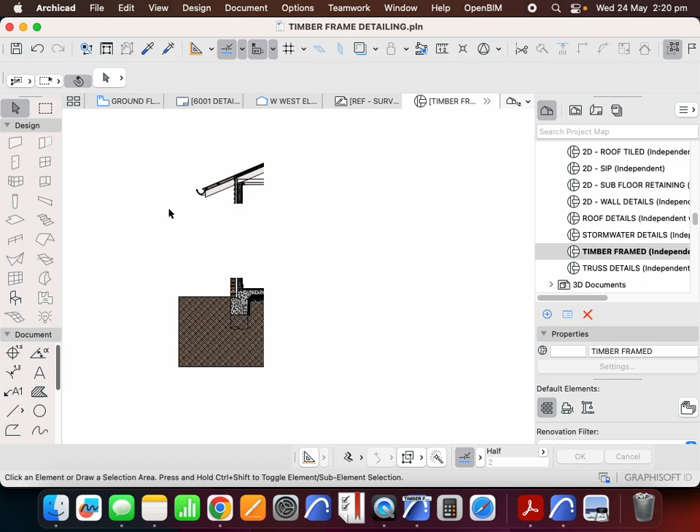Timber framing detail, where we're looking at 2D wall sectional detail, which includes the wall, its connection with the roof and ceiling, and the connection with the slab or framed floor. We've primarily just been focusing on a single story residence where we're not paying any attention to a first floor. That's what we're going to do now.

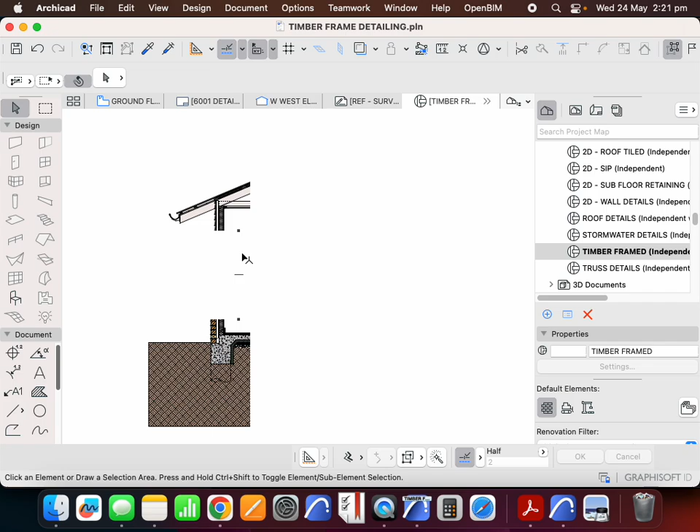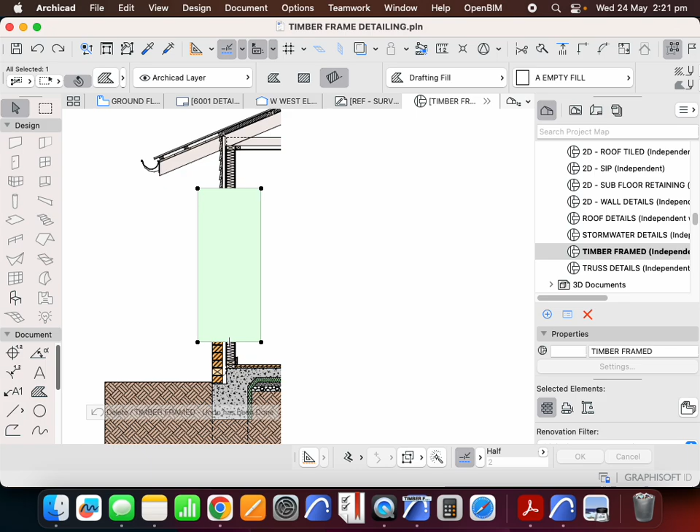So we're going to copy this detail. We'll move it across 10 meters like the other one was. And we're going to turn this into a 2-story detail. So in order to do that, we're in essence saying that that fill doesn't exist, and we're not really overly interested in what's happening from that connection, what's happening from this connection. We're going to add something in the middle.

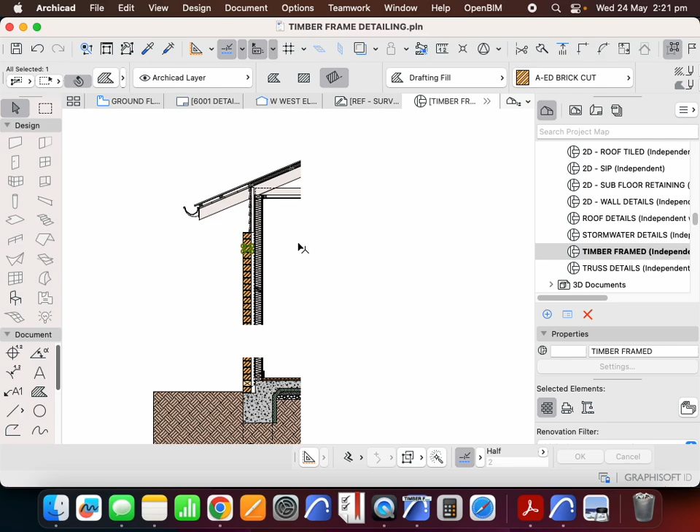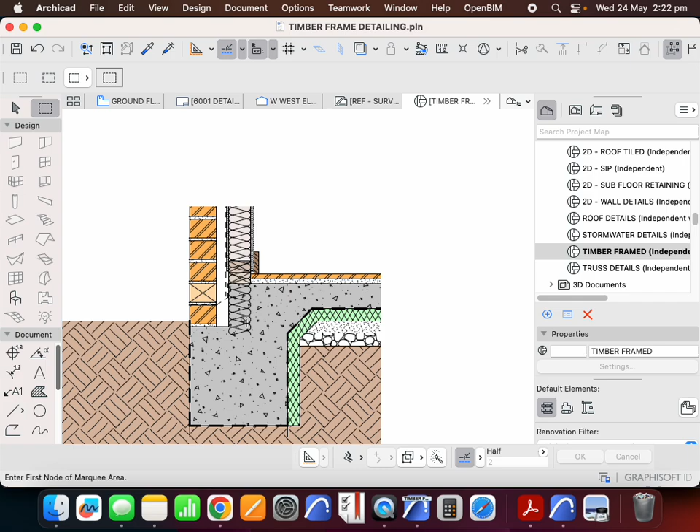Now we may actually do this slightly differently, or another way of saying that is we might add some more weatherboard for part of this, or we could have brick. It doesn't really matter. Now, what we're assuming here is that we're saying that there is a top plate of, let's move this down a touch. Edit, reshape, stretch. And we'll stretch this one down.

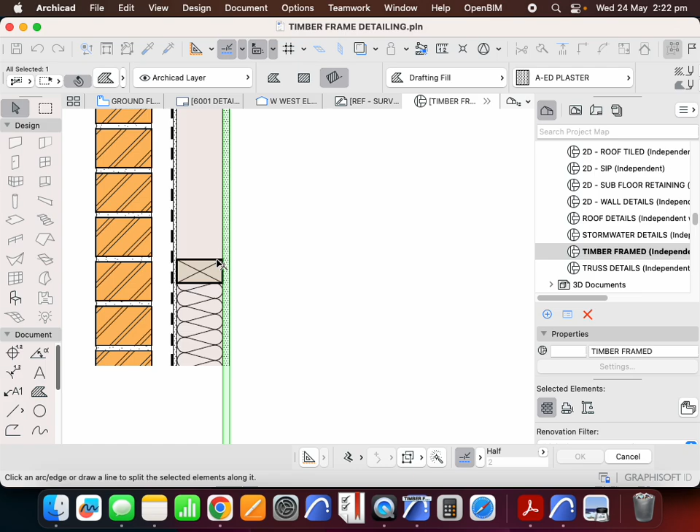So we have our insulation for our ground floor story. And then we need to have a break. What I tend to like doing is just breaking all of this here, and this makes life a lot easier rather than having to make it all stretch. So we'll just start by removing a section here, and then we can add it back later if necessary.

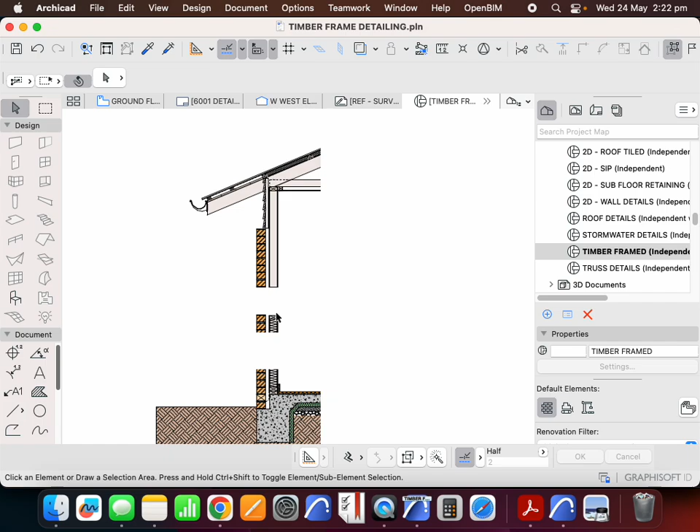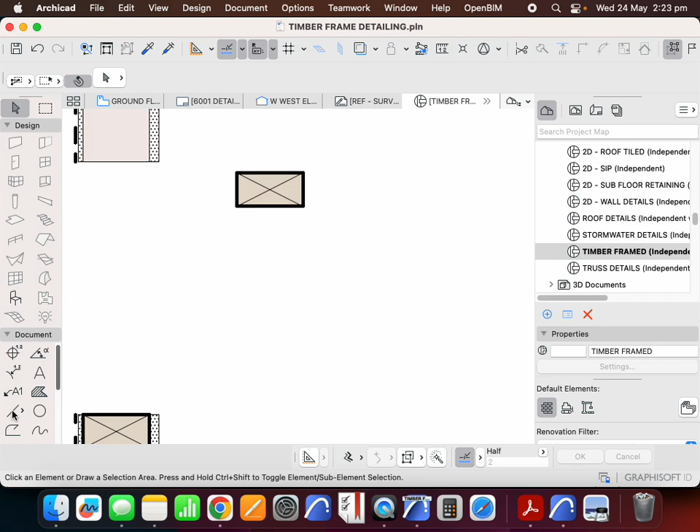Now, instead of having a framed floor out of pine, we're going to use an engineered timber. The engineered timber that we're going to use is called an I-joist, and sometimes it's got other names than that, but it's a block of timber. In this case, we're going to use one that's 90 by 45. And then there's another block of timber. And so these form the flanges. And then there is a piece of ply in the middle, which is what this was supposed to be.

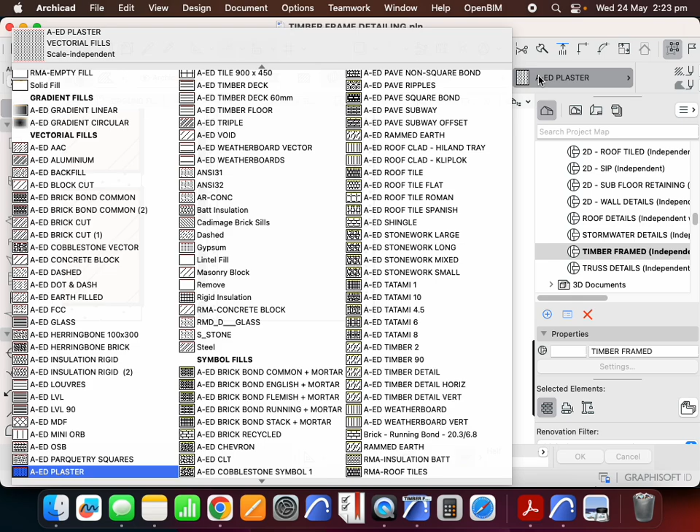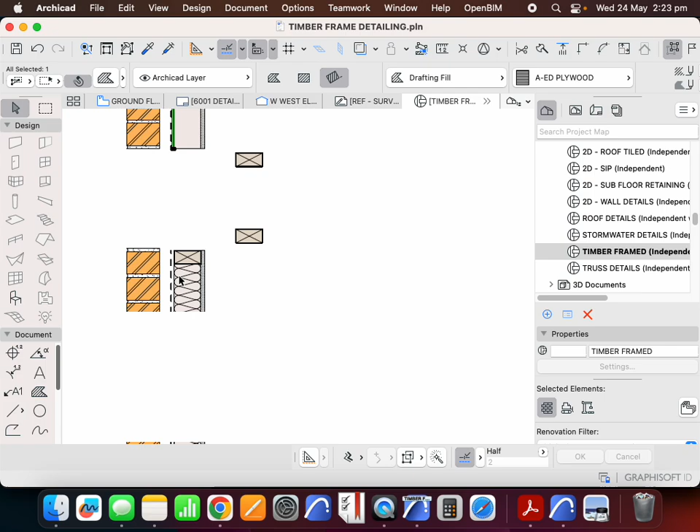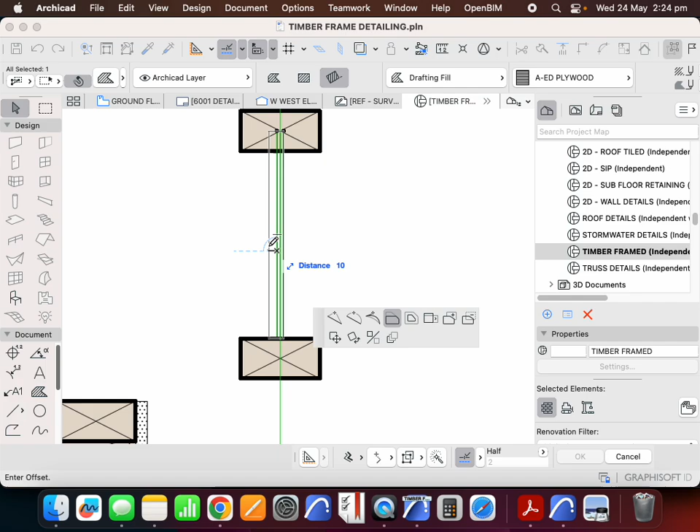I forgot to change it. So let's change this to plywood. And that's supposed to be rotated. So we'll copy this. And we'll make this a bit wider. So we'll make this 12 mil. So we'll go additional 3 that way, additional 2 that way.

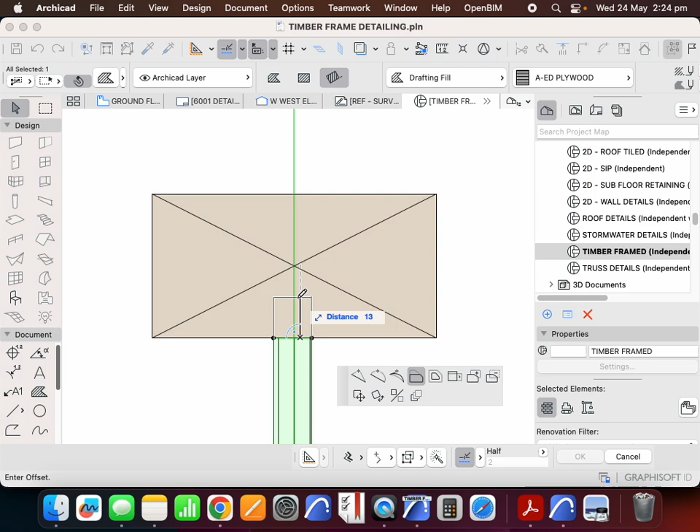And it's normally recessed not quite the half of the timber. I'm going to turn off true line weight for a second to make this easier to see. So we're going to recess this in 15 millimeters. And we'll recess this in 15 millimeters. And we'll just chop that out. And chop that one out.

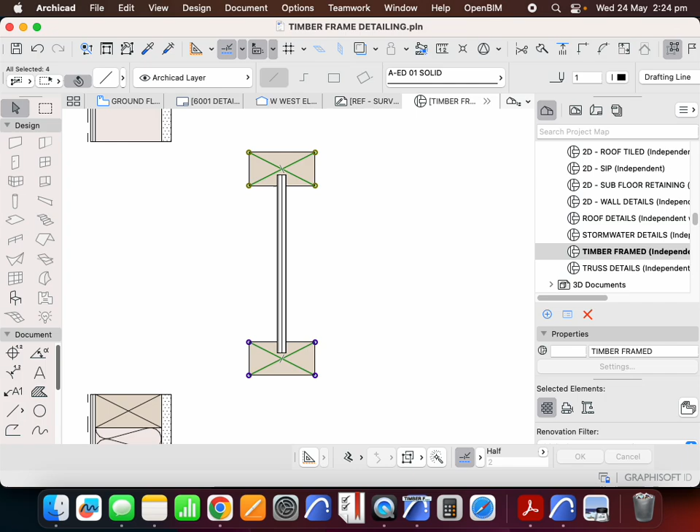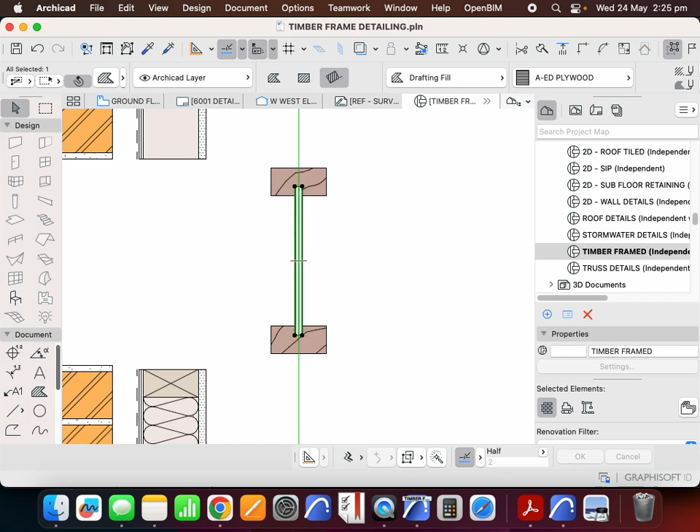Now I could get rid of these X's if that's not making a lot of sense. I could replace that with dressed timber, if that was a little bit easier to understand. The reality, it's not really dressed like that. It is still more just a structural element, but this might be slightly easier to comprehend. So this is what our I-joist looks like. Of course, we could add a color on the back of that as well.

Let's check that out. And this is in section, so we'll make the outline a little bit thicker as well. Great. So let's group that together. That's our I-joist. Now the idea is that this is our main structural element for the first frame floor. Now you might say this isn't really strong, and yeah, that's true. It's not really strong. The point is that it doesn't need to be as strong as it is tall.

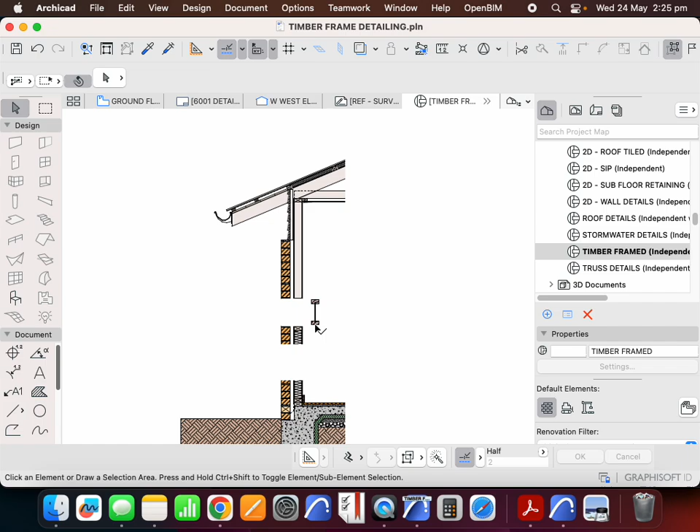In this case, it needs to be tall so that it can allow for things like plumbing traps and air conditioning ducts. We could get away with spanning most first framed floors with maybe a 200mm beam. But in this case, we're going to use a 300mm beam so that it has the ability to not just span a long way, but also to be able to take those other services.

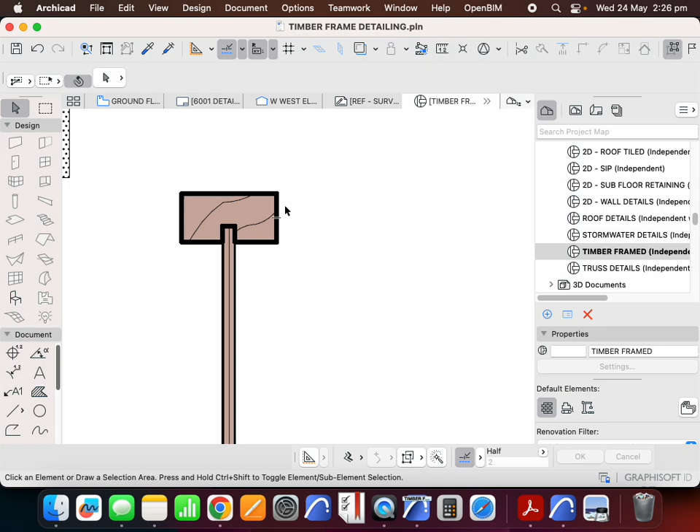I like using this larger flanged section, the one with a 90mm flange. It just makes construction easier. It's not considerably more expensive, and of course it's a little bit stronger than the 45 or 63mm flanged version.

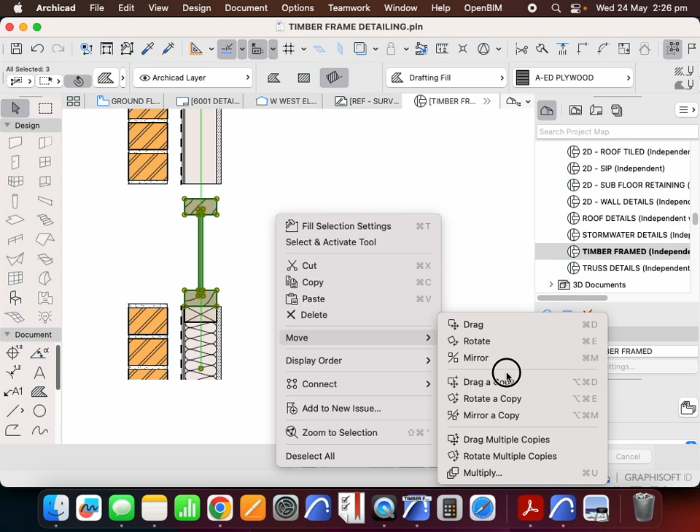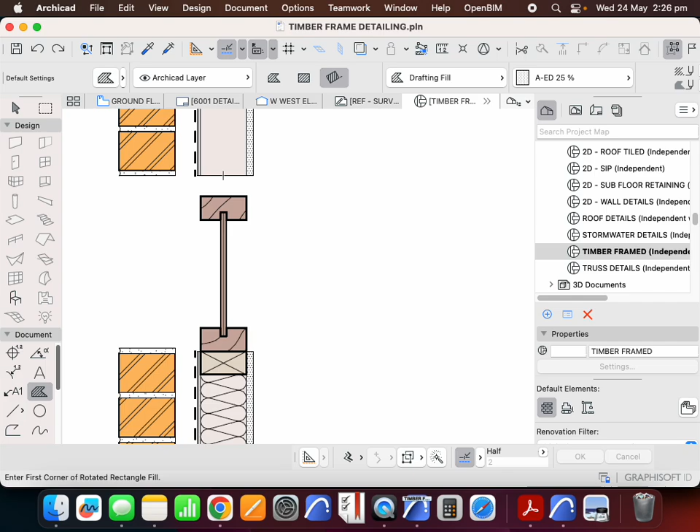Now, depending on which way we're looking at this detail, or depending on which way the floor is being cut, our joist is going to sit here, and then it's going to be multiplied at something. So at 600 centers, 450 centers. And so we may be seeing it in this direction. In this case, I won't make it viewed in this direction because that's hard to tell, hard to understand. So instead we'll see it in the other direction. So it's going to be spanning this way.

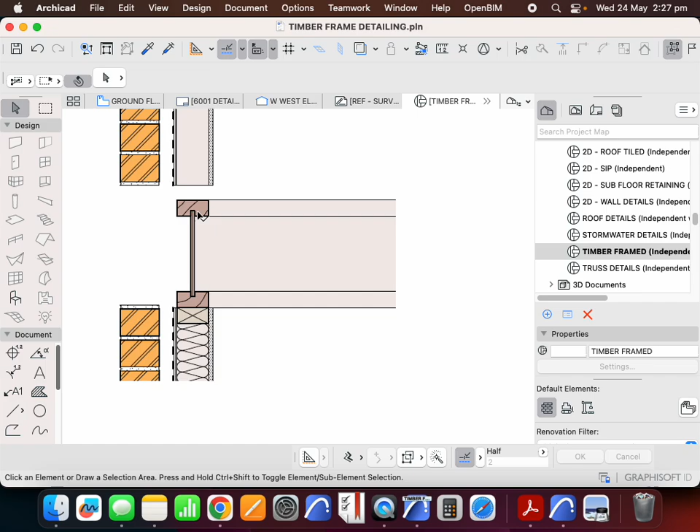So in order to represent this, I'm going to draw this same I-joist, but I'm going to draw it in elevation. So of course it looks like that, and basically like that. So this is our I-joist in elevation, and therefore what this is doing is creating blocking. So what we're seeing is the blocking between. Now in order for that to be blocking between, we should also see another bit there. Now we're missing the bottom plate of the next, so let's copy this one.

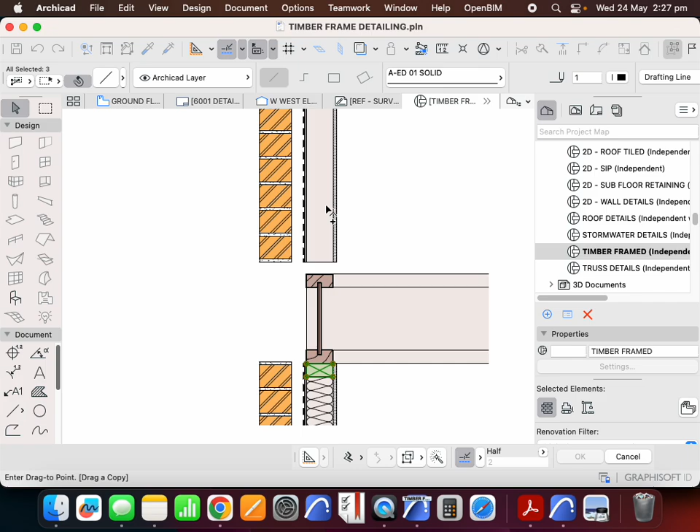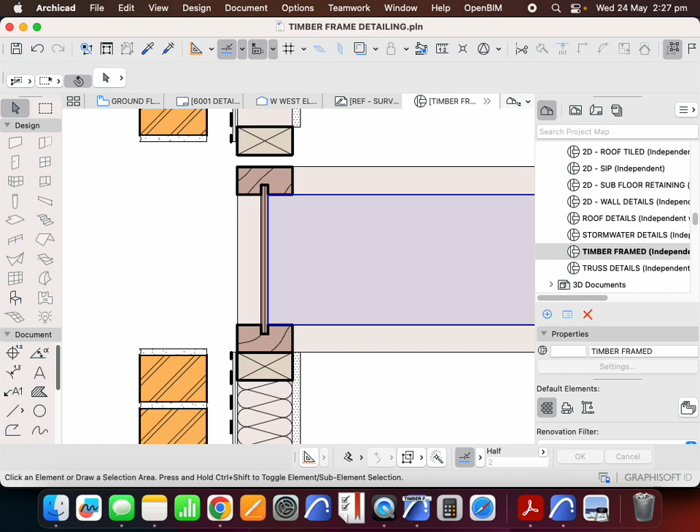Now we don't want the bottom plate to sit directly on the floor joist. Before we have the floor joist, we're going to have our structural flooring. So I'm going to go up 19mm, and that's going to allow for 19mm of plywood. So just like we had plywood here, we're going to copy this ply. Let's just do that before we start, just so that's easy to understand. I'll copy this plywood, move, drag a copy, rotate,

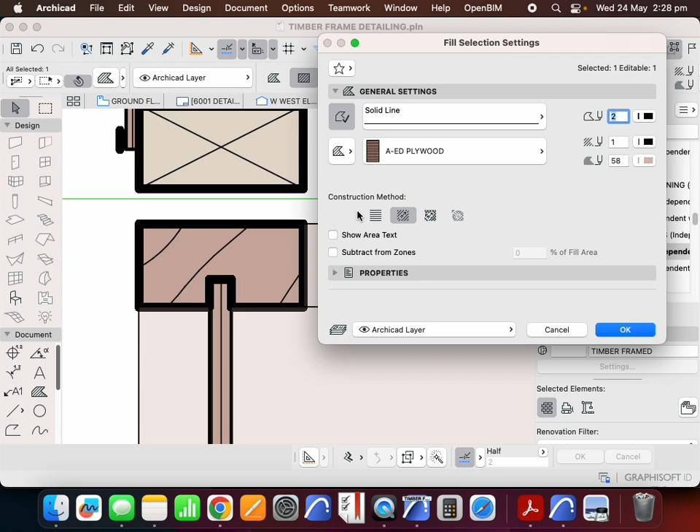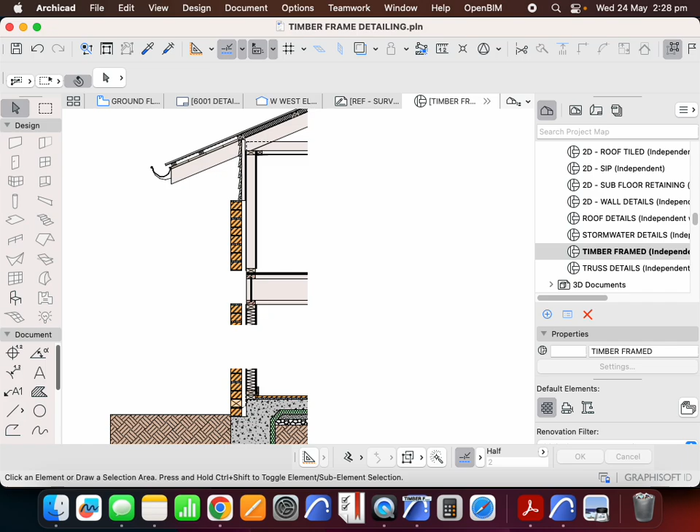and I don't need to have the fill in the same way, so I could turn fill back to normal. So it's going to sit here, and I want this plywood to be 19mm thick. We'll extend this one all the way through, and that's our structural flooring. Now on top of our structural flooring, we'll also have something else. And so that could be carpet, or it could be tile, like I had down here.

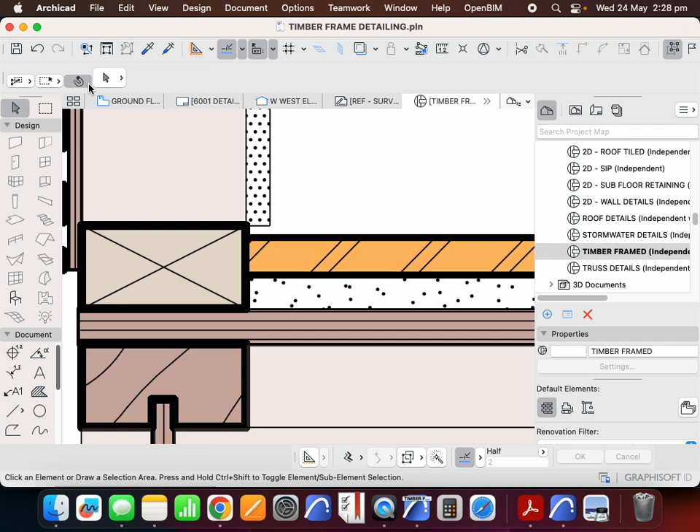Now I wouldn't be using plywood if it was a bathroom, but if it was a living space or a bedroom, let's say I wanted it to be tiled, I could do something like that. Similarly as before, in order to make this work, once we have a thicker flooring, so let's leave that as it is at the moment. So I could double up this bottom plate and leave a bit of a gap with my plasterboard, and then I could add a skirting board down here.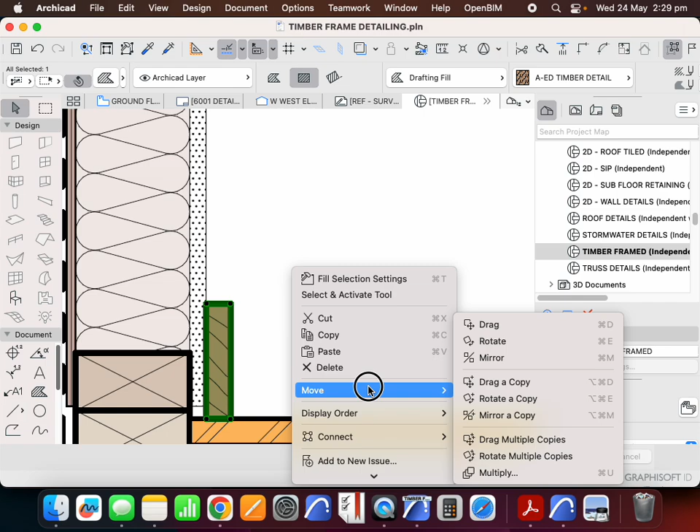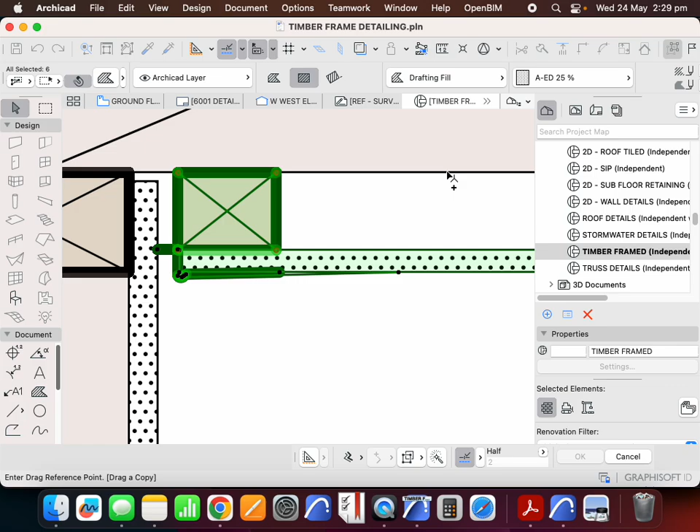How do we do the ceiling? Now the ceiling could be plasterboard direct stick to the underside of this, or we can do the same detail as over here. So that's what I'll do in this case. Copy this down. My intention, of course, is just to make this easy for myself and make it fast for you to be able to recreate as well. So just look back at another video to see how and why we did this.

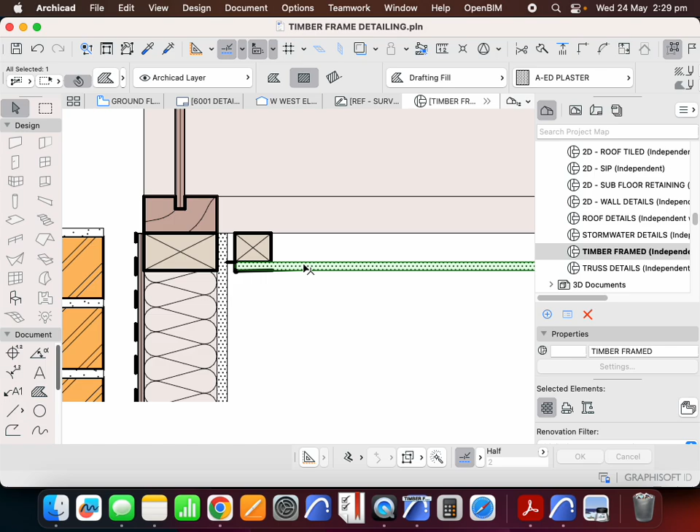So this allows the plasterboard to run up past. The batten also means that if there's any inconsistencies with the set out of these high joists, the batten will reduce any inconsistency so the plasterboard can be flatter and will reduce the likelihood of cracking.

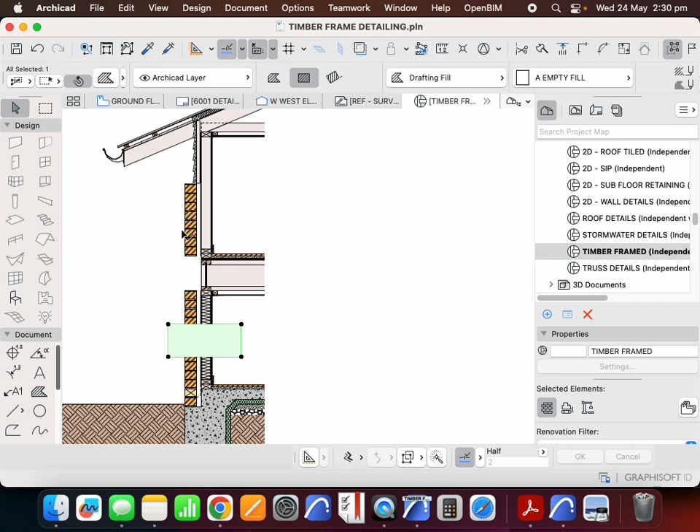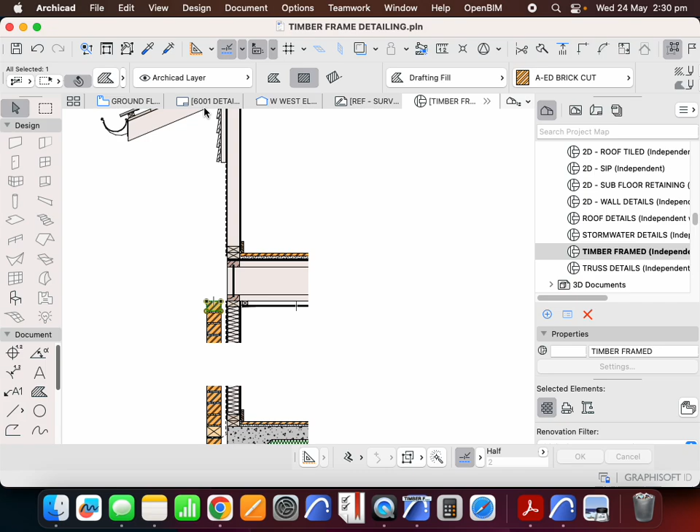Just like I've got this fill here, which is breaking the wall, I'll then need to do the same thing here. Now this is not representing really well at the moment, is it? Generally speaking, I will want the brick to stop somewhere. That might be the top of the floor, or it might be the bottom of the floor down here, and then I'll have my weatherboard extending down. Now, typically I'm probably going to try to relate that to a datum, something that makes sense on the outside of the building. I could have this brick running the whole way up, or I could have this brick stopping. So it doesn't really matter is the point, and we can do it in a few different ways.

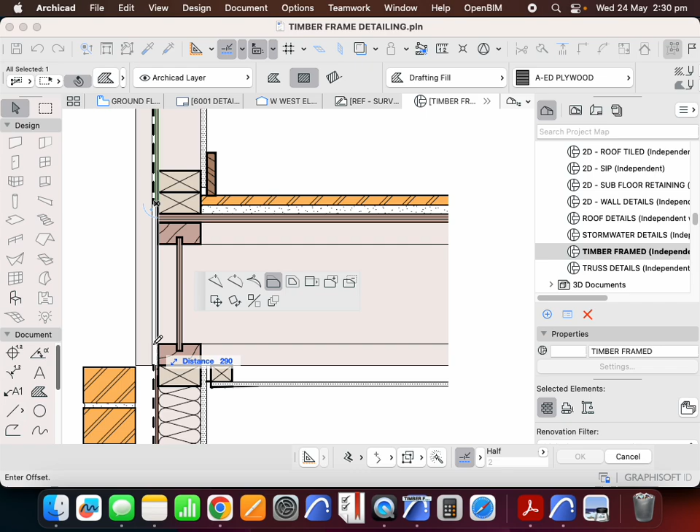So just to make this simple at the moment, run this down, and we're going to use the bottom of our floor to define the edge of this. And we're going to run this all the way down just so it's consistent, and we'll be running the sarking or the membrane all the way down. Now I get to show you how we finish these at the bottom. So let's copy all these, and we'll go move, drag multiple copies using that as the reference point.

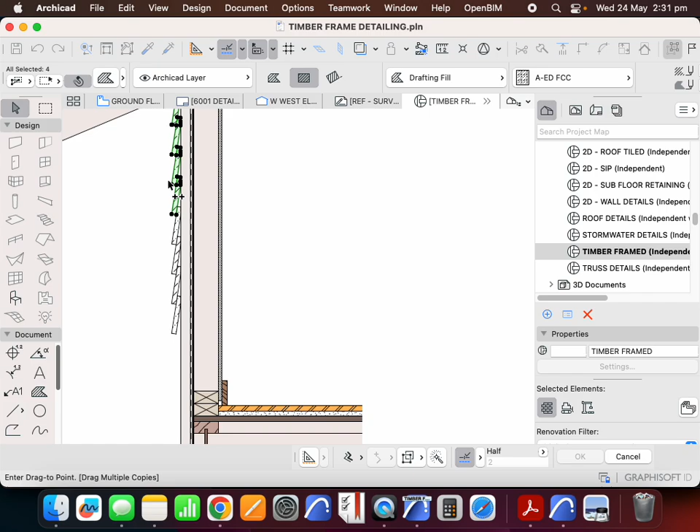And I always just do more than I need, and then I can quickly delete any leftovers. So I don't need this one, don't need this one, and obviously this one is only half. So we'll chop that off. And I also want to leave a little bit of a gap. I don't want to have weatherboard touching the brick, so let's leave a 10 mil gap there.

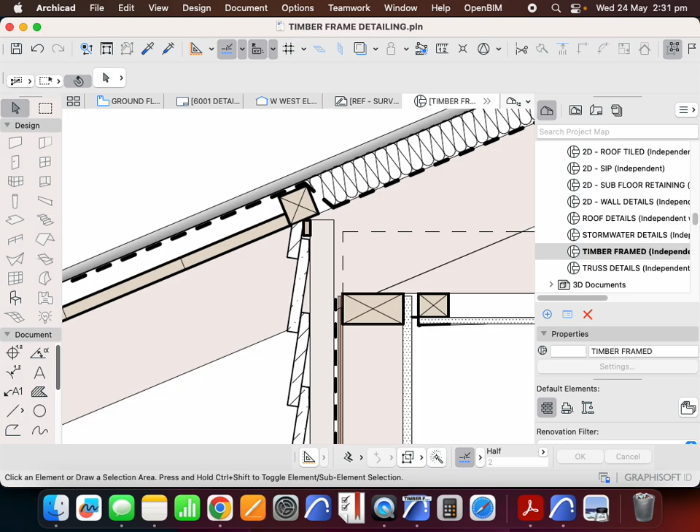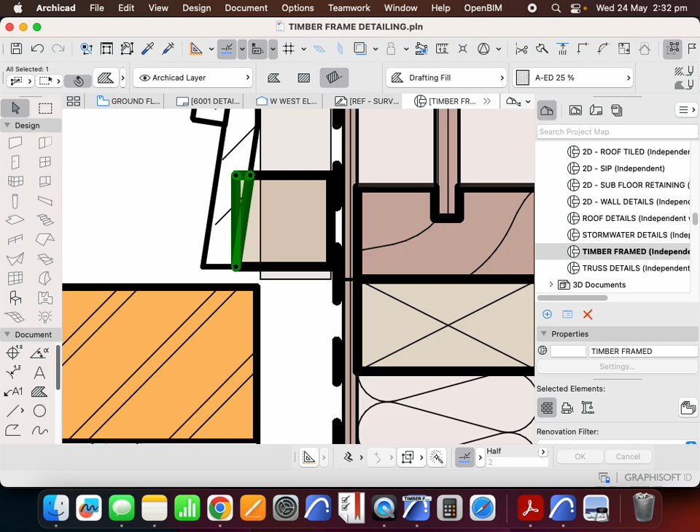And then it's a question of how this is finished, because of course this isn't going to work, is it? So we need some type of, again, blocking like we had up here, packing. Now typically we could use a proper packer. In this case, what I'll do is use a larger block of timber, and this would be cut to fit perfectly to size. So we'll stop the vertical batten, that'll turn into horizontal batten, and that'll be cut to size in order to be able to put this in the right position so the angle is consistent.

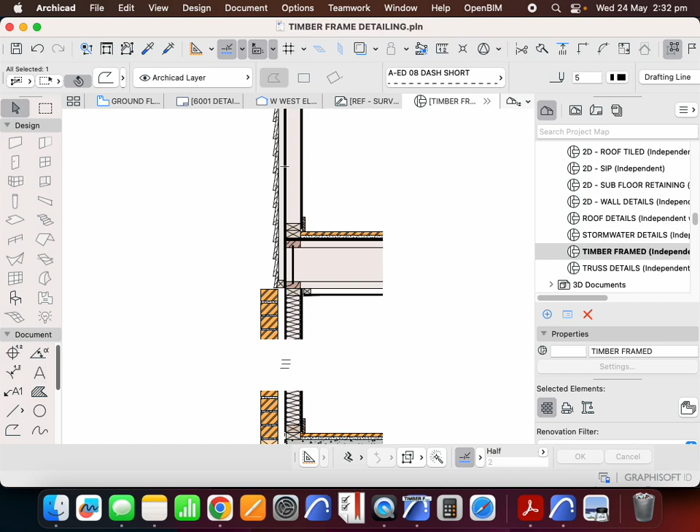Now I need to get a little bit more detailed here. So I've got my sarking. I don't want this sarking just to run the whole way down. I want to have some type of flashing. So I could have a hard flashing, so a folded Colorbond flashing, going from the outside of the brick, so over the edge of the brick. That will then sit behind the sarking. Let's make that 4.

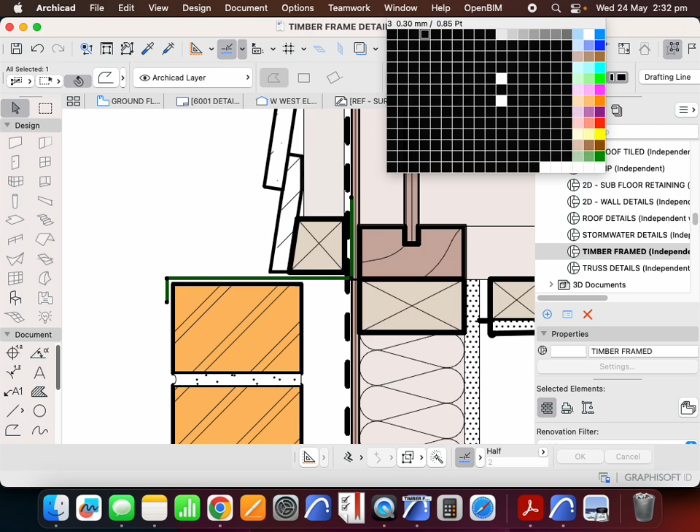And then of course the sarking would start again here. So this is acting like the weep hole, like we have in the bottom of the brick. In this case, the folded capping is also creating this overlap between the brick and the cladding.

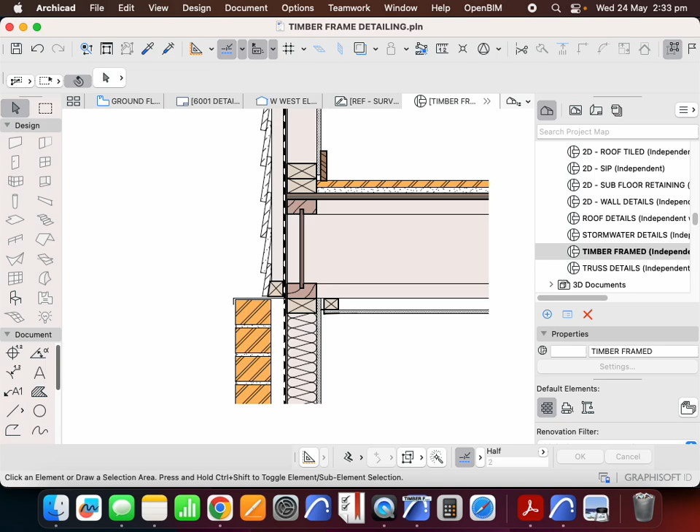Now we could say, I don't like the look of that detail. I don't like the fact that this brick is sticking out a long way and the weatherboard is set all the way back. Now this is common, but if we wanted, we could of course pack all of this weatherboard out so it was flush with the outside of the brick. But in order to do that, we'd need a much larger batten. In this case, I really don't care. I'm happy to have this spaced.

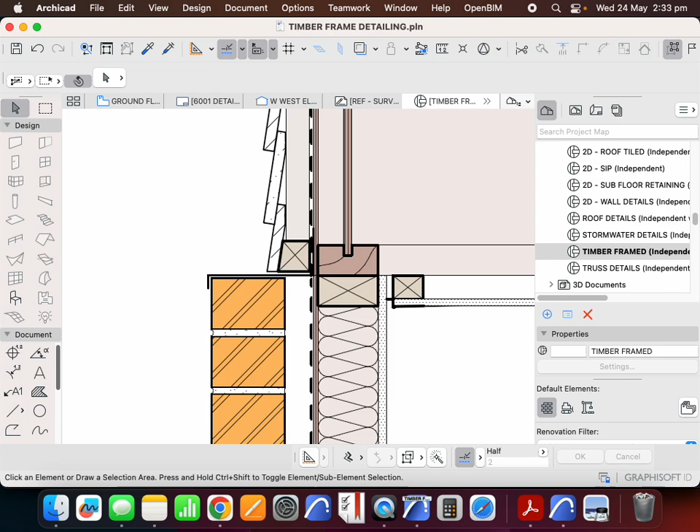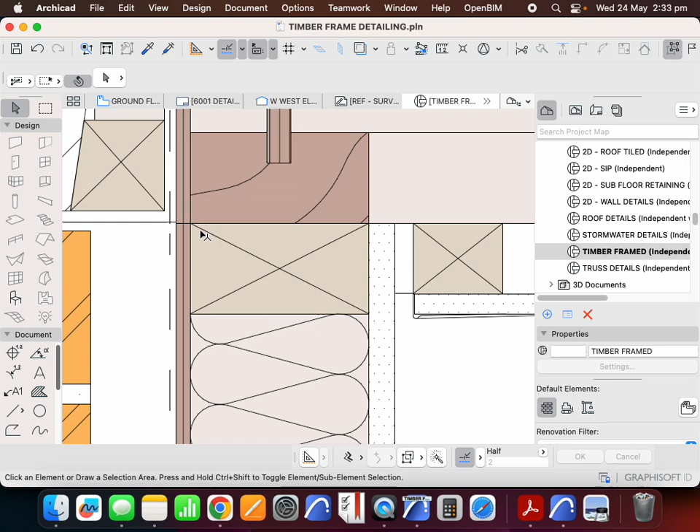There's one more detail that I need to explain in terms of this capping, and that is, in order to make this capping look nice, I don't just want to finish like this either. I actually want to double this back, or fold this back, and that'll make this capping significantly stiffer by having a crunch fold on the back. Now this capping needs to go up higher. It needs to be about 150 mil at least, and I'll stop this short just to explain what's happening there a little bit more clearly.

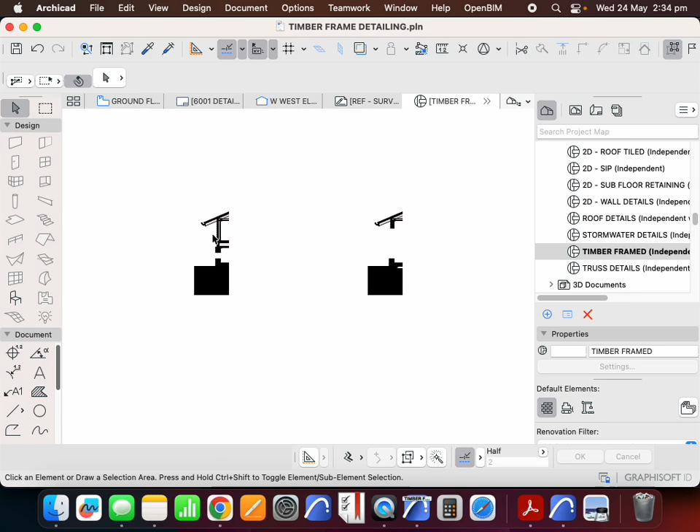And so now I'm transitioning from brick veneer to timber frame and clad. In this case it's a horizontal weatherboard, and that weatherboard is made out of fiber cement. So of course we could substitute any of these other finishes that we've been talking about. So it could be a quad gutter, it could be a flat soffit, it could be Hebel cladding. It really doesn't matter. These are all now external systems which can then just get plugged into our timber frame structure.

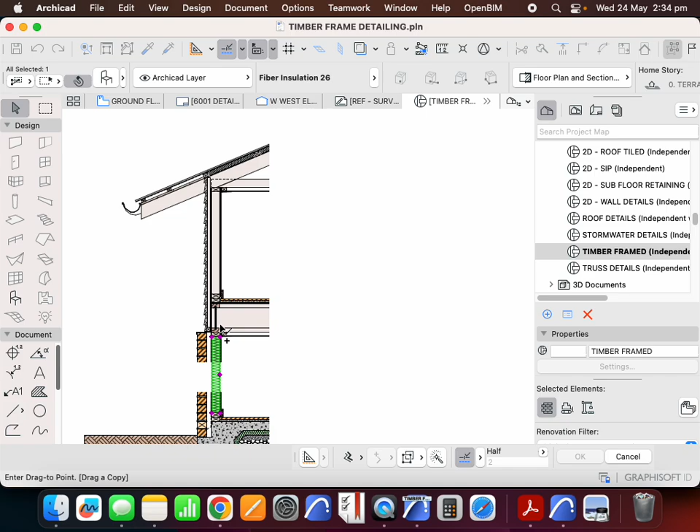To finish this off, let's extend this insulation. We also need our ceiling insulation, so I'll copy this across.

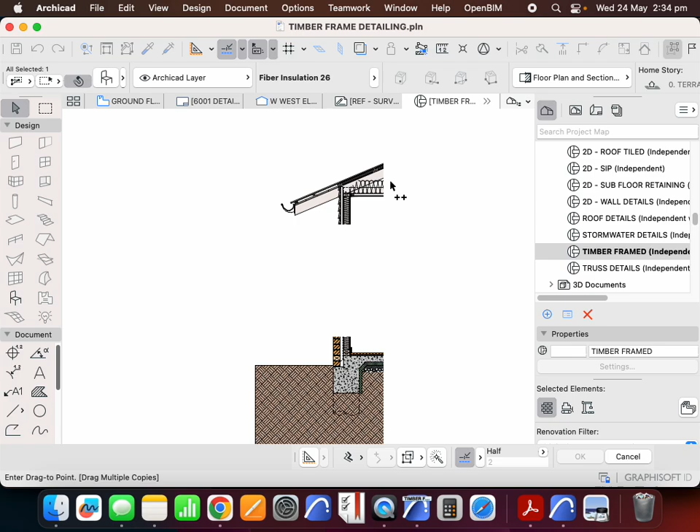There's a few little things that I had missed before or hadn't explained very well. One of those is brick ties. So when we have a timber frame wall, we also need to connect the brick into the timber frame. The brick on its own could be structural, but because it's a single skin brick, it's not very good at being structural.

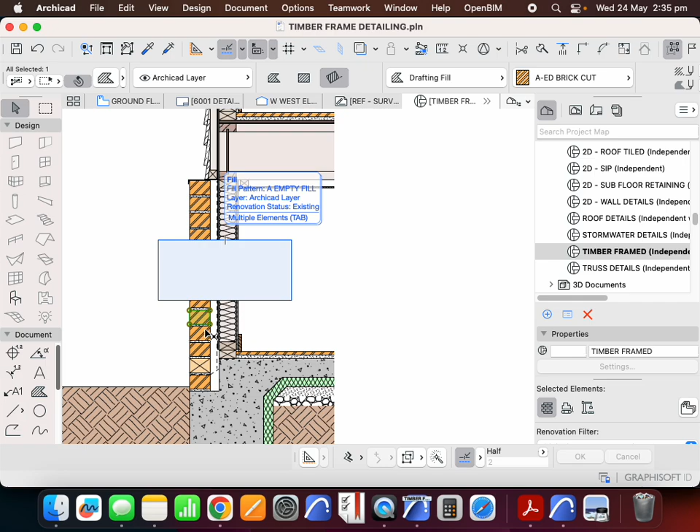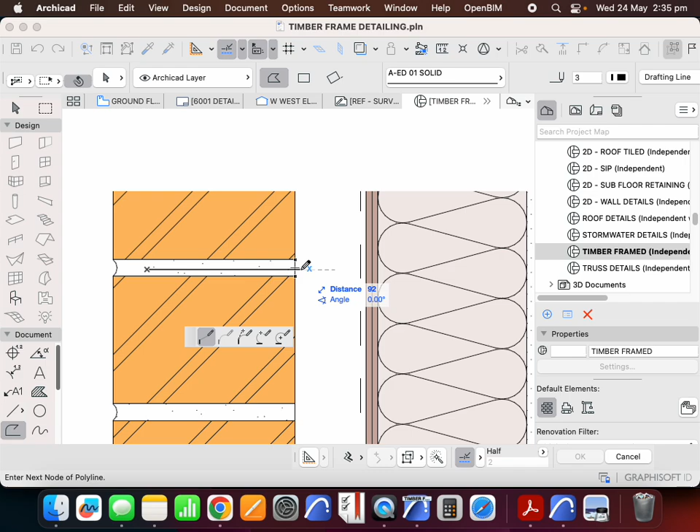So in order to be able to make it strong or not fall over, we're going to tie it into our timber frame, which in this case is the structure. Generally, we need brick ties every 6 courses. Because I can't see that, I'm just going to add one here. And what that brick tie will look like in this particular instance is it will be bedded into the mortar bed. And then I want it to have a bit of a kink.

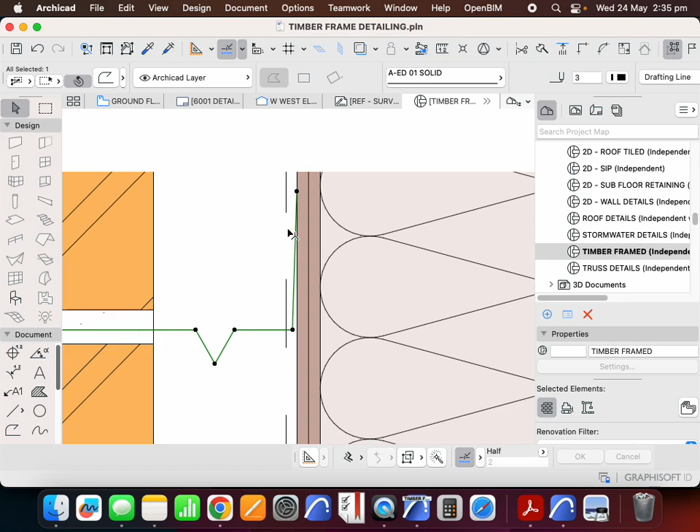That's going to allow water to drain if it's running along. Sorry, let me finish this to make a bit more sense. Any water that's running through the brick is then going to drip down the cavity rather than running all the way to the wall. And then I'm going to have the tie, which then gets screw or nail fixed into a stud.

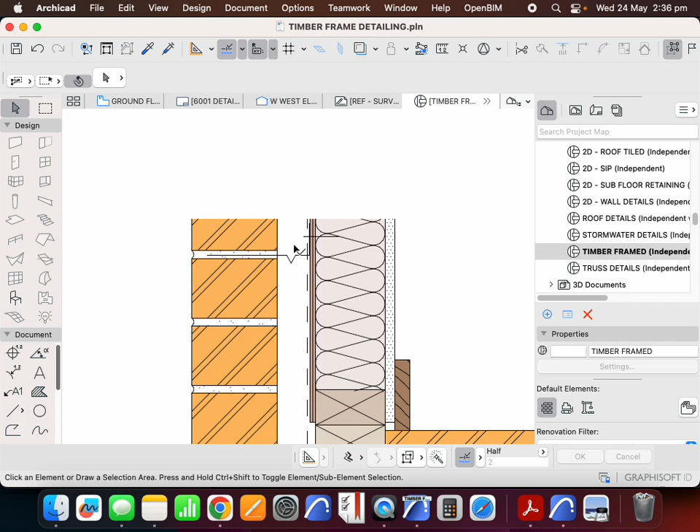So I could just change that to be a center line or a dash line. And that's our brick tie. And of course, we'll have another one further up. So we can repeat this. So let's just put one here just for the sake of representation. Now I'm still missing some information. So how am I providing termite protection?

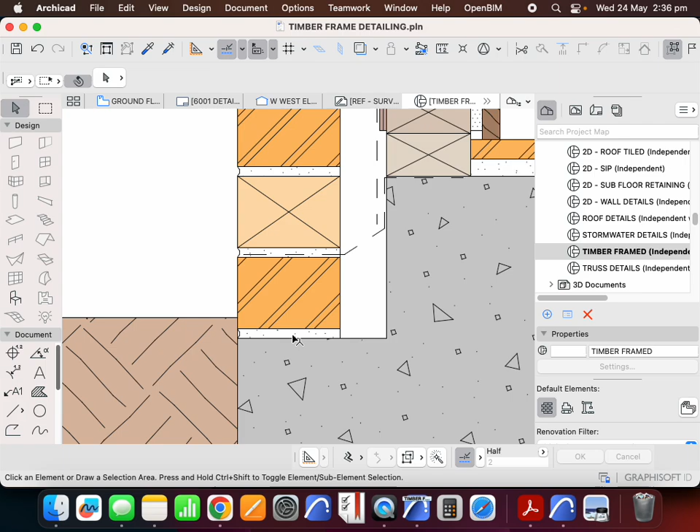In this case, it's very possible that we could have termites coming from the ground, going through this mortar joint, going up here and into the building. So I'll typically require one of a few different solutions. So I'll need some type of membrane, which is going to make them not want to climb up here. That might be Kordon, so a plastic with chemical impregnated in it, which is not really nice for termites.

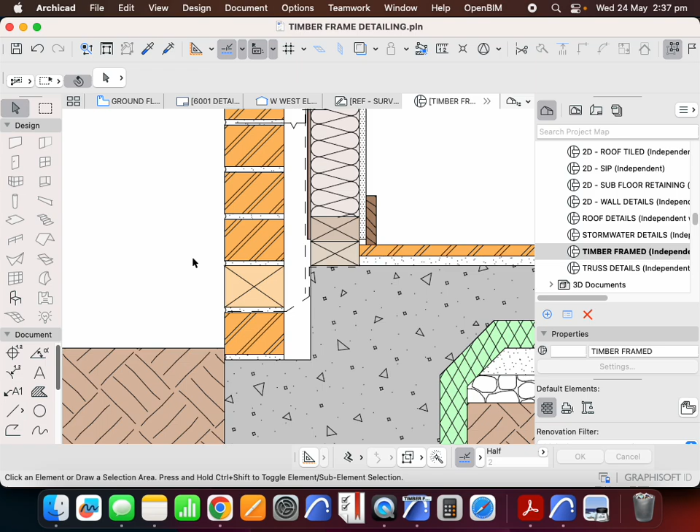Or we might have Granitgard, meaning that it's a physical barrier. They can't climb through the granite is the idea, the little bits of granite. Or we might have a termi-mesh. And the idea of a termi-mesh is that it's similar to the granite guard. In this case, it's woven stainless steel with a really tiny aperture, and it stops the termites from climbing through that as well. So that's the 3 most common methods of how we would do this approach.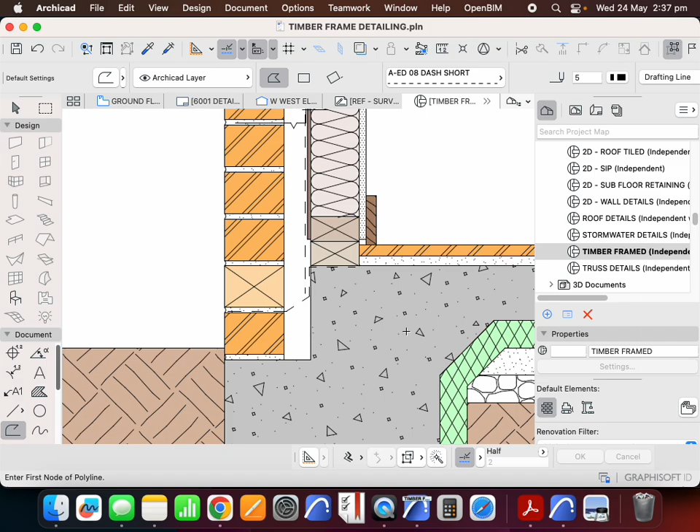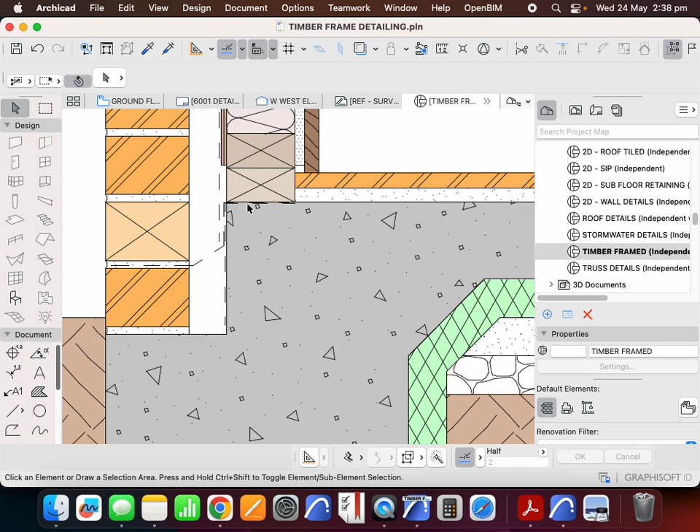Now, if I was doing Kordon, I'd probably just use a thick line, a really thick line. I'd probably make it dashed. And I would be showing that that is fixed to the downturn here. It'll be sitting underneath my flashing. And so it'll be a second layer, basically, something like that. And that Kordon will extend through here a little bit. So we could have a Kordon finish.

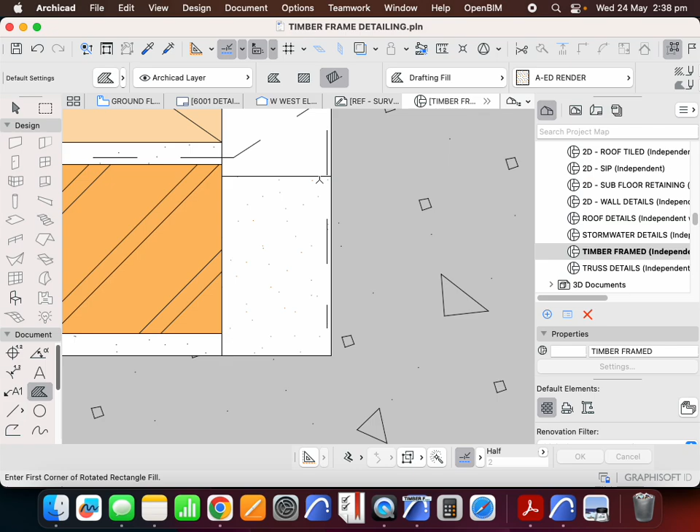We could have a Granitgard. The Granitgard will basically be a little tiny gravel. It's going to be hard for me to represent that, so I'll just represent that as render at the moment, and that will fill up the bottom of this space. And I might just change the colors of that. Let's make it real dark. So that could be my Granitgard.

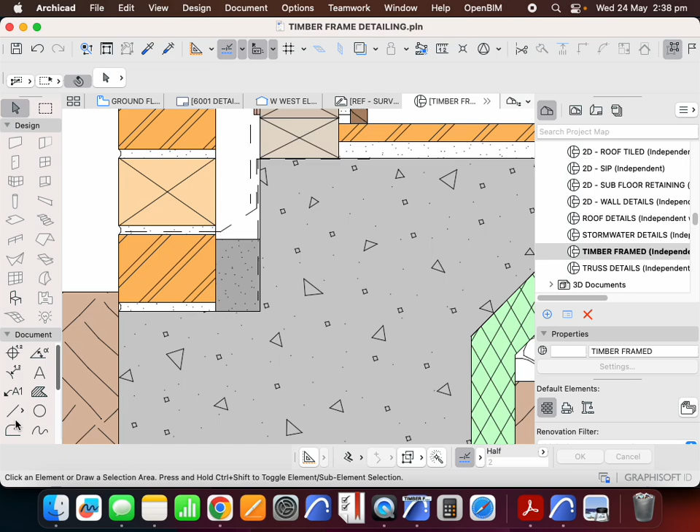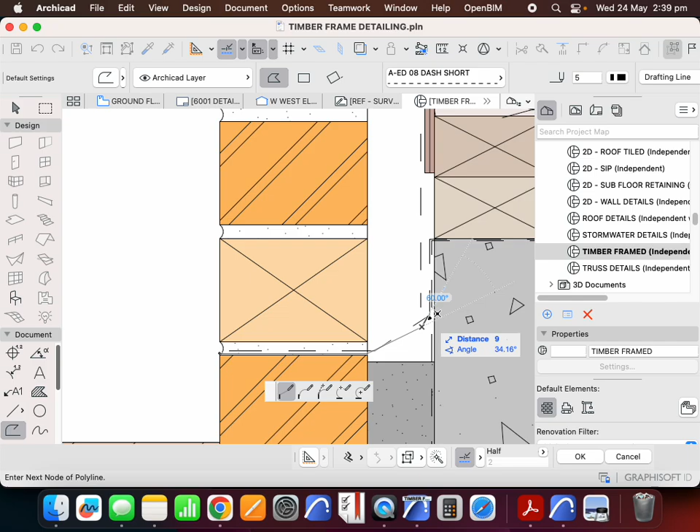And the Termimesh would be similar. So the Termimesh might be underneath here. Typically I want it to go outside as well. And it's going to continue up underneath and prevent the termites from climbing in underneath that point. So these are our termite protection solutions. They're not perfect. Of course, nothing's perfect. We could, of course, have a chemical barrier outside as well.

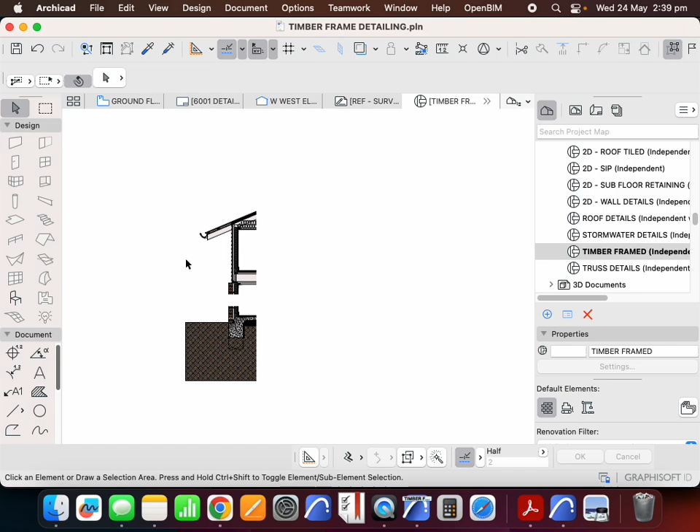But our detail's starting to look pretty good. I'm not covering everything, but it's really just about representation at the moment. We're just building the basis of our details. And then as we keep layering up different information we need to add, we'll keep adding a bit more information like dimensions and annotations.

One of the next things that we'll be doing over the next week or so is adding a window or different types of windows into our section. At the moment, we've just been looking like we're cutting through a boring part of the wall without any windows. We'll then be looking at how we add a window into this detail as well, and the different aspects of what that means for the window sill and the window head and a lintel or a structural frame, which then supports the top of that window.